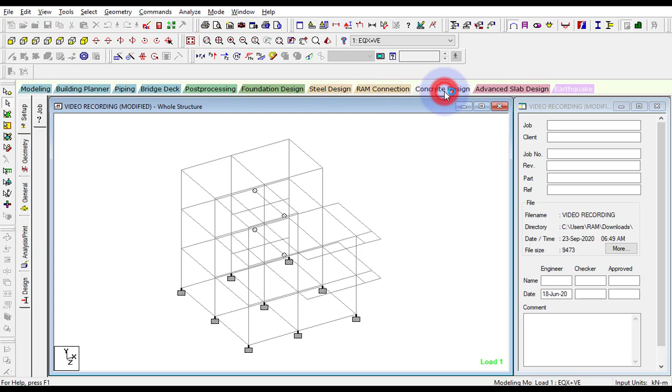सो आफ्टर एनालाइज द स्ट्रक्चर, डबल क्लिक ऑन कंक्रीट डिज़ाइन। यहाँ पर पिछले वीडियो में मैंने आपको ग्रुप्स एंड ब्रीफ्स के बारे में एक्सप्लेन किया था। हमने ग्रुप्स भी क्रिएट कर दिए हैं और ब्रीफ्स भी क्रिएट कर दिए हैं। अभी हम कंक्रीट मेंबर में जाते हैं और डिज़ाइन में जाते हैं, यहाँ पर हमारे पास टोटल 64 मेंबर्स हैं।

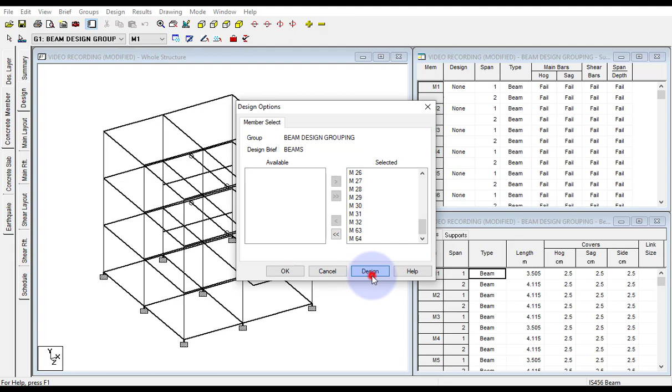यहाँ पर M स्टैंड्स फॉर मेंबर। मैं डिज़ाइन के ऊपर क्लिक कर रहा हूँ। It will take some time depending on your structure to analyze your model. So it will take some time to analyze as well as to design your structure, and based on that it will design your model.

यहाँ पर आप देख रहे हो कि हमारे पास ये डिज़ाइन हो गई है। स्टील ग्रेड शुड बी Fe415 और लेसर। यहाँ पर मैं क्या कर रहा हूँ, हमने Fe500 यूज़ किया है तो Fe500 यूज़ करने की ज़रूरत नहीं है क्योंकि आपका स्ट्रक्चर इतना हैवी नहीं है, तो आप Fe415 भी यूज़ कर सकते हो।

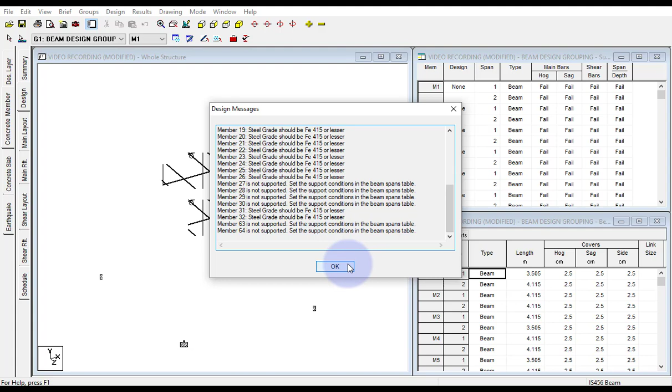सो लेट अस से आई विल बी मॉडिफाई दिस थिंग्स। आई विल बी गो टू द डिज़ाइन लेयर, ग्रुप्स एंड ब्रीफ्स, बीम्स, एडिट ब्रीफ, and I am unchecked for this option right now - check for IS 13920, that is design shear.

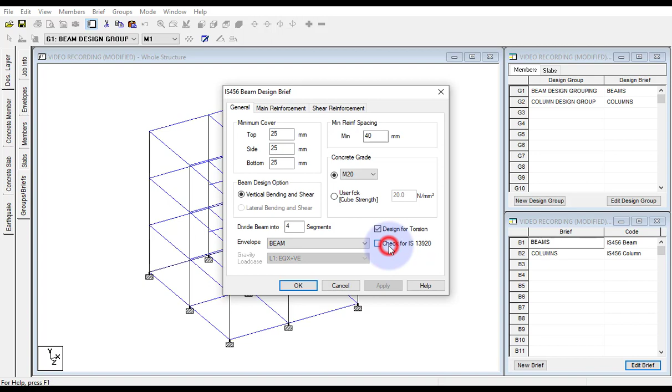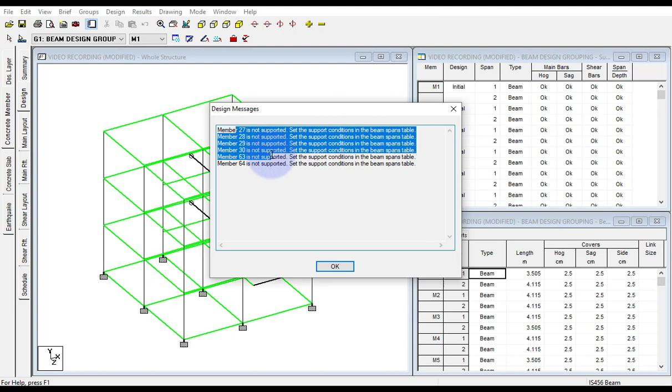यहाँ पर मैं अनचेक करके ओके कर रहा हूँ और अभी मैं वापस कंक्रीट मेंबर में जाता हूँ और डिज़ाइन में जाता हूँ और वापस डिज़ाइन पे क्लिक कर रहा हूँ। तो आप देख रहे हो Fe415 की एरर यहाँ पर चली गई है। अब यहाँ पर और एरर है कि मेंबर 27, 28, 29, 30 ये मेंबर सपोर्टेड नहीं हैं।

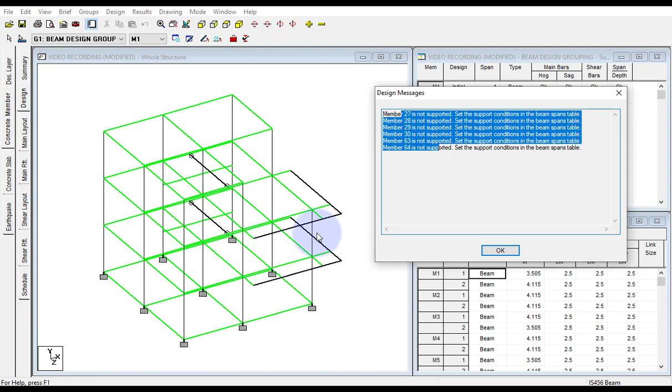तो ये मेंबर कौन से हैं? ये जो ब्लैक कलर के मेंबर आपको शो कर रहे हैं वो सपोर्टेड नहीं हैं। ये तो सिंपल सी बात है कि ये हमारी एक्चुअल बालकनी है, बालकनी इज नॉट गोइंग टू बी सपोर्टेड, दिस इज द कैंटिलीवर पोर्शन, so we don't have to focus on this. और अगर आप चाहो तो इसका साइज़ बढ़ा सकते हो और यहाँ पर कुछ बेस सपोर्ट्स भी अप्लाई कर सकते हो।

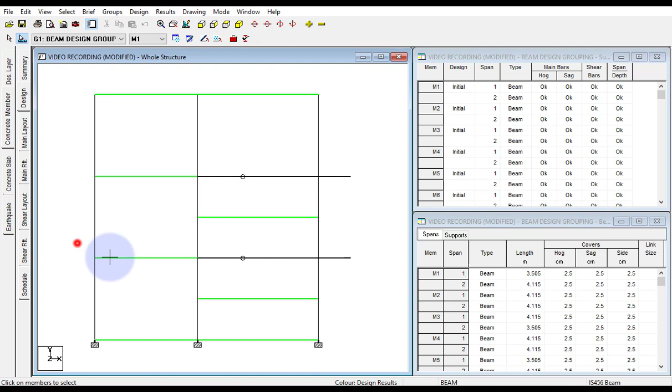So right now I am directly going to the main layout. But before going to the main layout I will go to the front view and select this view, create a new view, and go to the top view. So this is my top view of the first floor plan.

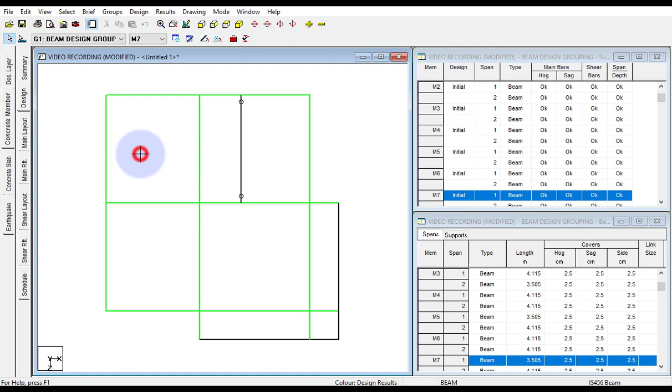Now this is my member, right? So I will double click on this member to see the properties and design of this member. Right click, labels, node number, element number, apply, okay. So here as you can see all of this node number and this red color is the element number. So here is the member number 29.

Right click, I will go to the main layout, and in the main layout as you can see I am selecting the beam. So depending on selection of the beam your reinforcement will be displayed.

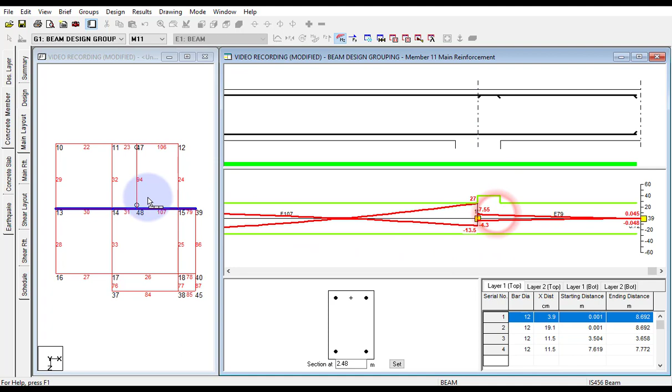So this is how you will be able to use the design option of the beam in the advanced RC option. Now I will go to the main reinforcement and select this. As you can see, this is your member 10, member number 10. If I select this, this is my member number 11. So this is my member number 10, and by selecting this member, you will be able to use this.

AST as well. So now hogging means reinforcement which is required at the top, and sagging means reinforcement required at the bottom. So at the top and at the bottom, at the ends, the moment will be higher.

As you can see, this is 0 to 3.96 meter, your moment will be higher. So this is your one beam, this is your 0, this is around 3 to 4 meter, and this is your 8 meter. So at your corner and at your junction, your moment will be higher.

So higher reinforcement will be required at the top, and at your mid span, your moment will be lower. So at hogging, this is hogging, this is sagging. Sagging means at the bottom and hogging means at the top. So as you can see, at sagging, moment will be lower, and depending on that, your AST will be required.

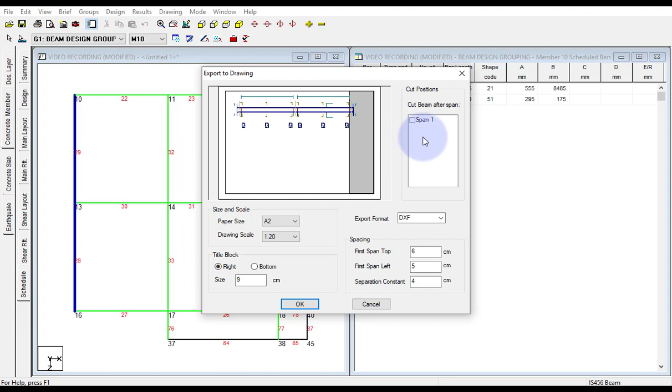So this is the type of information that we can collect from here - main layout, main reinforcement - and if you are using shear, you can also use the shear reinforcement, shear layout, and you can also take the scheduling, like schedule export to drawing, and click on OK. So this information you will be able to plot into DXF. So schedule, and as you can see, the type of format is DXF, and you can use all of this information and click on OK.

So it will produce your drawing, produce your DXF file, and you will be able to open this file in AutoCAD as well. So this is the overview of how you can review your beam design information from this, and you can collect this information and use it for your design purpose as well.

However, you don't have to follow this method blindly. You have to also use some practical consideration and practical design aspects as well in order to use this information.

So here, if you are using main reinforcement, there are so many number of sections, but you have to provide 3 sections - one at the corner, one at the middle, and another at the corner. So you can also use L/4 distance - from here L/4, from here L/4, and the rest is at middle.

So you can provide different extra top reinforcement at L/4. You can provide extra top reinforcement at L/4 from here, and remaining at the bottom. So in between L/2, there is no need to provide extra top reinforcement, and in L/4 from here, L/4 from here, there is no need to provide extra bottom reinforcement as well.